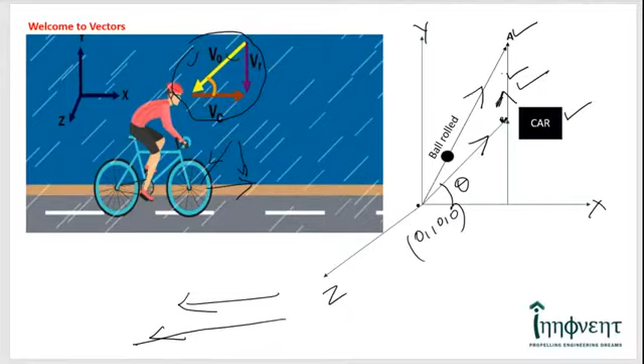When it comes to rolling, again we use vectors, and by using vectors you would have proved in your +1, +2 that this point O is the instantaneous center of rotation. When I say instantaneous center of rotation, that point is characterized by zero velocity. Why is it so? Because there is no relative motion between this roller and the ground.

And as a consequence, you would see that V is equal to omega r, where V is the velocity of center of mass, and omega r is the velocity due to the rotation. So it's a 1-degree freedom system. So let's apply this particular concept to a GATE question.

Now you see here that since this is the instantaneous center of rotation, this is a fixed point, and if you seek velocity at any point on the roller, it is quite simple. It is omega cross the position vector, right? Omega cross the position vector.

So the highest point and the lowest point would obviously have a velocity difference of 2 omega r, because if you go by this, the topmost point, the magnitude of the position vector is 2r, and since omega is constant and they are perpendicular to each other, if you take the vector product, the topmost point is characterized by 2 omega r and the bottommost point is characterized by zero velocity.

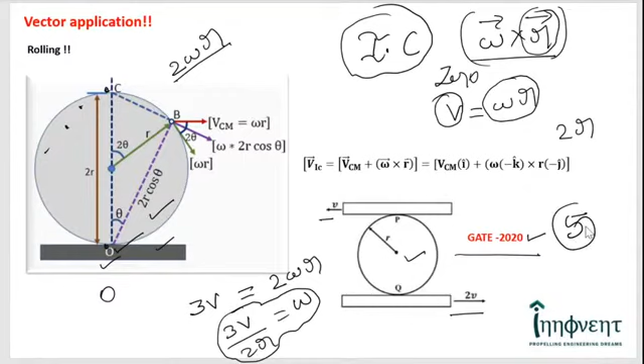Of course, it's an elementary concept, and if you look at the typical question of GATE, you can clearly see that the bottommost and the topmost point have got a velocity difference of, this is in positive x-axis, this is along negative x-axis, so the difference in velocity is 3v, and that is equated to 2 omega r, because this is perfectly rolling, GATE 2020 question, and therefore 3v by 2r is the value of omega. If you understand this simple concept, the time that you take to answer this question is approximately 5 seconds.

Now let's mature the discussion slightly and look at this particular example. I want to calculate the angular velocity of this particular link, and I'm not going to apply anything new. The velocity difference between this point and this point, that is the relative velocity, is nothing but omega into the position vector, what I discussed in the last slide. See, it is applied here. Further, we can use vectors in a number of areas. I'm going to walk through before I get into a detailed devoted discussion for vectors.

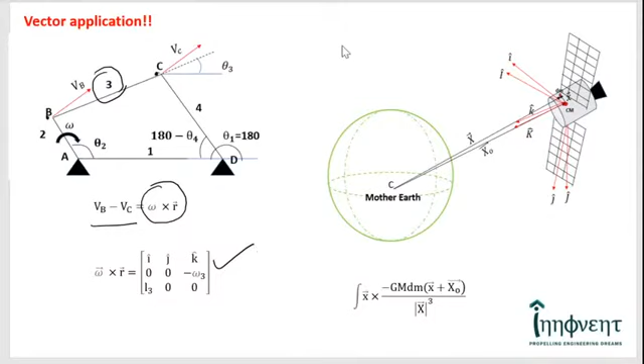You might have heard in the satellite industry that especially for low Earth orbits, satellite stabilization is done via gravity gradient torque. Most of you would have heard this. Any body which is asymmetric would experience, for example, if I take this point and this point, let's call it A and B. If this experiences a certain gravitational pull and this experiences a certain other gravitational pull which is lesser or greater in magnitude, then this entire satellite is subjected to a torque, and that torque is called gravity gradient torque.

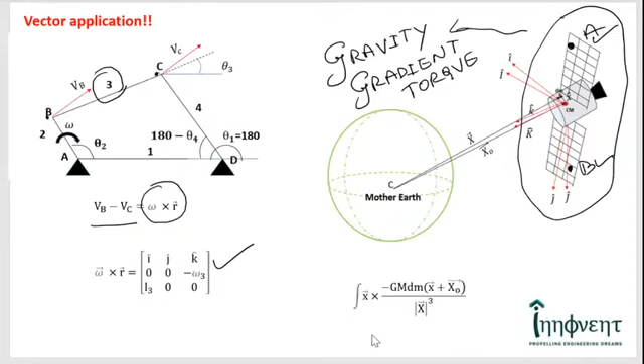You can see here, though this requires further simplification, I have chosen a mass element here. Hope you are able to see that. And I have written an expression for gravitational torque because of the resultant vector of the distance from the center of the Earth to the center of mass and the distance of the elemental mass, that is, this is the vector from the center of mass of the Earth, and this is the vector of that elemental mass from the center of mass of the satellite, and this is nothing but the gravitational force.

You might have seen this expression with r square. You see here r cube because I have expressed this in terms of vectors, and since it has to be only the direction, I again divide by the magnitude of the vector, so that is where I get this particular vector, and with that cross product with the position vector x, I end up getting the gravity gradient torque.

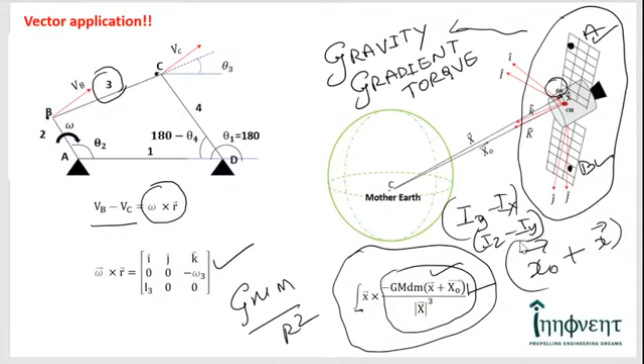In fact, if you simplify, you will get a very, very neat expression, and we would make use of the fact that gravity gradient torque is proportional to the principal inertia differences about any two axes. For example, it could be proportional to Iy minus Ix, or it can be proportional to Iz minus Iy, and of course in one of the directions, your inclination does not influence this. We'll get into that discussion in some other webinar when it comes to dynamics, but we are talking about vectors.

And similarly, if you look at the Coriolis effect on a missile, if you launch a missile, it misses the target by a certain value, and that is because of the Coriolis effect. The method that we have given here to assess the deviation is a simplified one. What we say is, per se, the velocity or the displacement of the projectile is not affected by Coriolis force. Rather, the Coriolis force provides an additional displacement because there is angular velocity of rotation of the Earth, and there is the velocity vector of the projectile at every point.

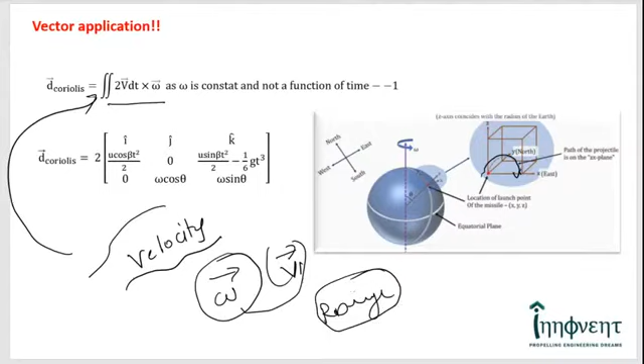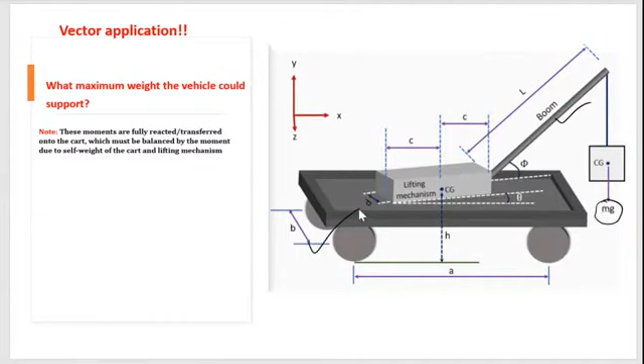And if we account for these two, the Coriolis effect provides an additional displacement, and that is where it would help the missile miss the target, and that has to be accounted for if the range is significantly large. Otherwise, the contribution by the Coriolis effect is not that great. In another example, you can see that a large weight is hung from the boom, and you can in fact calculate the moment contributed by this so as to assess the stability of this particular vehicle. Again, the use of vector product.

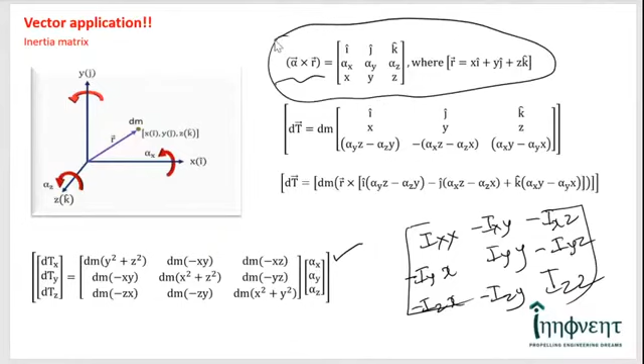Again, to derive the general mass moment of inertia tensor, what we call IXX, IYY, and IZZ, if the body is not symmetric, you would also get the cross inertia products. We'll discuss this in detail when it comes to dynamics. I'm just telling you that using basic vector product, you are actually deriving this particular matrix. So this matrix can be derived using basic vector product. That's what I'm trying to impress upon. I'm just going through various applications.

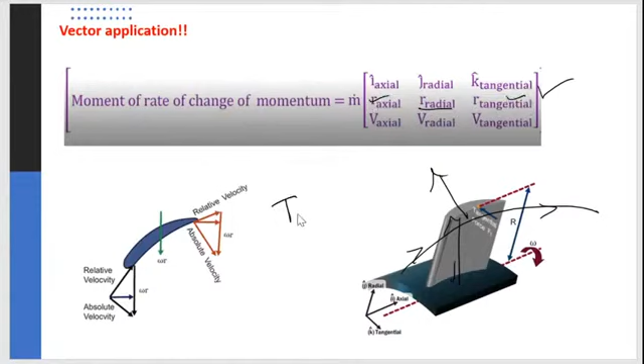Now, if you look at this particular slide, again, the vector product is used to compute the torque contributed by moment of momentum. That is, as the gas or fluid flows across the blade, there is a momentum change, and that momentum change would bring about a torque at the bottom. And you can see that for a blade, only the radial component exists, that is the moment arm, and these two don't. And as a consequence, you would get two torques. One is the tangential torque, which has to be absorbed, and of course the axial torque, which is the useful torque in driving the turbine. So again, here moment of momentum of the fluid is computed using vectors.

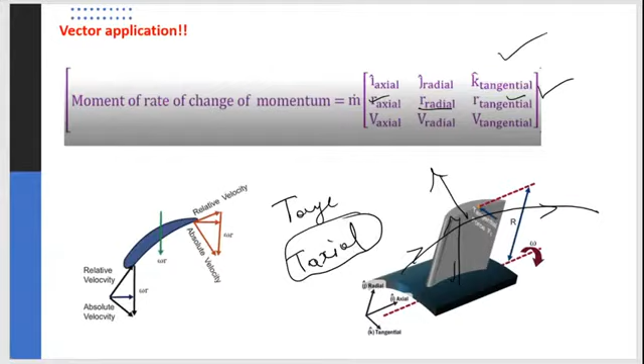One more important situation: whenever rigid bodies are undergoing motion, and if they are associated with unit vectors, then what is very, very important is that those unit vectors also are differentiated because they are associated with rigid bodies. For example, you can see that the wheel is not only spinning about this particular axis, that is the i-th axis, but about the vertical axis, that is the y-axis. It is also precessing, right? And therefore the spin vector has to be differentiated, and we'll look at this particular fact.

In fact, if you look at this example, the mass is moving with velocity v, and if you differentiate it, since it is also spinning, you get two components of acceleration, the centripetal and Coriolis. This is where differentiating a unit vector becomes very, very important. Incidentally, note that if you differentiate a radius unit vector, you would end up getting omega times the tangent unit vector, and if you differentiate a tangent unit vector, you would get the negative of the radius vector, of course multiplied by omega, the angular spin rate.

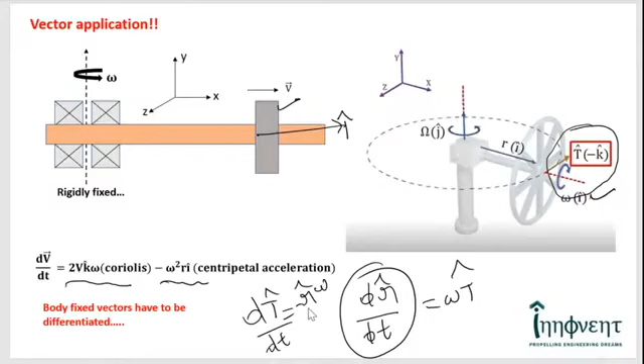Okay, these are slightly advanced concepts which we are going to cover through the course. Now, these are some typical dot products which you have learnt in your school also. But one thing I would like to emphasize here is that this is an important one, because you can see that L here we mean to be the angular momentum. Some people represent this by H also.

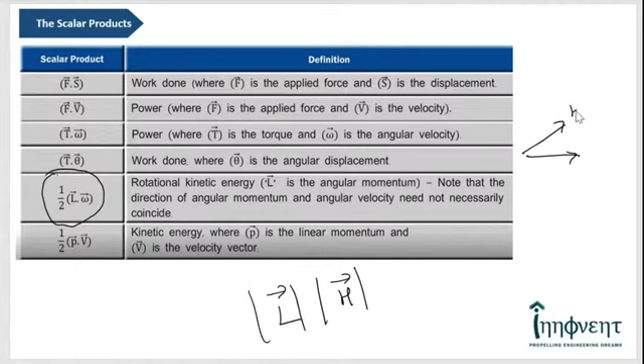And what is important is that if the angular momentum direction does not coincide with the direction of spin, then that leads to an unbalanced torque. How to go about this? We would look at it carefully, and then you also look at certain typical vector products which we saw in rolling, and then this was the moment of momentum which we looked at in a typical turbo machine situation. This is again the torque expression, and similarly you can have Coriolis, you can also have gyroscopic couple.

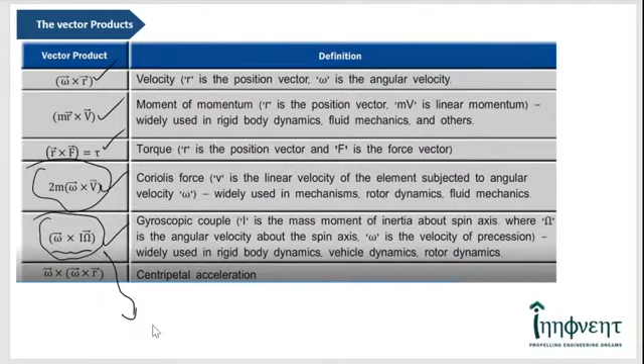And one of the advantages of dealing with these inertial couples, gyro, Coriolis, is you are able to get the direction of the couple and hence the reaction couple, because whenever you're dealing with gyroscopic couple, you're interested in the reaction couple because it is an inertial couple. It's a non-dissipating damping factor in vibration. Okay, that should be carefully understood. We'll discuss that. But the point I'm trying to say is if you use this formula and then derive any inertial quantity, you can be rest assured that you are getting the right direction. Okay, from an elementary problem solving perspective I was emphasizing.

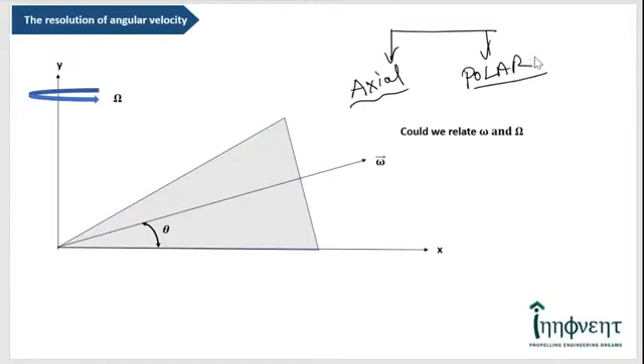And please remember that before we go in detail, there are two categories of vectors. One is of course the axial vector, and another is the polar vector, right? The direction of polar vector is natural to reckon. That means if I say a bus is traveling with certain speed along certain direction, then that is very, very natural to reckon.

But as far as the axial vector is concerned, let's say I consider a roller rolling on a ground ideally. If I consider omega, and that omega has to be represented, since it is clockwise, we would use a right-handed screw principle. That means omega can be represented by minus omega k. That means omega is along the minus k direction, and the direction is coincident with the axis of the roller. Okay, this is the omega angular velocity vector, and that is represented here.

And sometimes you may also want to split the angular velocity vector. Look at here. This is capital omega, that is, it is going around about the vertical axis. At the same time, it is also spinning about its own axis. And here, you can in fact split omega to be omega cos theta along the x-axis, and then the vertical axis component would be omega sin theta, right?

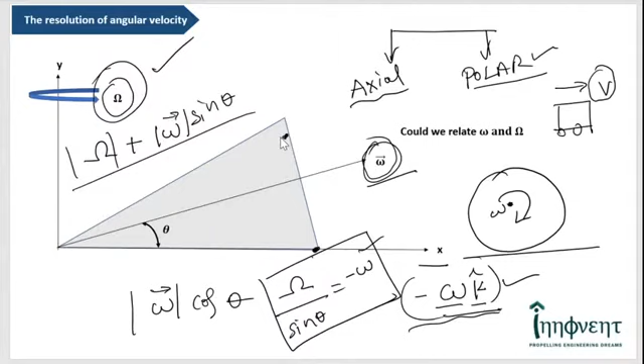And if you are interested in a general point, you can investigate, develop a position vector, and then differentiate once or twice depending on whether you are seeking velocity or acceleration. And again, this is a classical situation. Now let's move on. Now let's consider one particular case which can be applied to several product lines across the industry. This is very, very important. So follow this particular derivation carefully. Though it is a very elementary discussion, it is applied in several situations.

Now, as I said, let's consider a spin vector along the vertical direction. Let's also consider a general vector which makes an angle theta with respect to the spin vector. Now, if I split this particular vector along the x-axis and also along the y-axis, that is, if I take the components, then you can see that along the x-axis, ax is the component, and along the y-axis, ay is the component. Now let's look at differentiating this.

All right. Now, I'm going to give you a very, very basic physical observation. I'm not going to be a purist here. Now here, you see, when I take the component of this particular vector on the y-axis, that vector is along the spin direction. That is, it is spinning in the anti-clockwise direction. That is why the vector is along the positive y-axis, to be noted carefully.

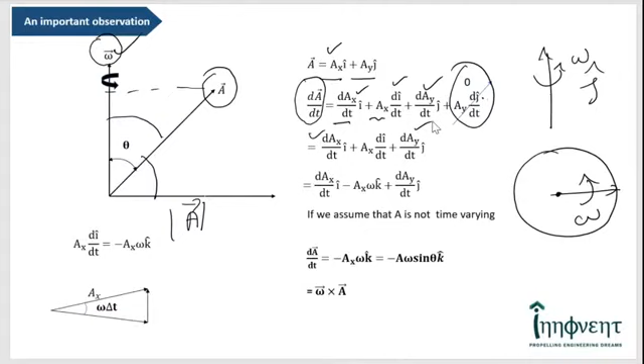But I clearly told you that since the j component is along the spin direction, it is constant, it is not undergoing change. So that goes to 0. And if I assume that Ax is not changing with respect to time, and Ay is also not changing with respect to time, then I am left with only one quantity, that is Ax into di by dt. Now we can clearly see in this diagram that as A is spun, this small change is given by Ax into delta theta.

And if I take this rate of change of A vector when it is spun through a small angle delta theta, this becomes the rate of change of that particular vector. And that change, observe carefully, if you looked at the top view, it is happening into the plane of this particular PPT. That means it is along the negative k direction, that is the negative z direction, and this is nothing but omega. So when I compute, neglecting the magnitude changes, only the direction change, I get this quantity, and this can be easily converted into a vector product.

And you see that the negative sign is justified because when you are taking the vector product omega cross A, the angle is measured from omega to A in the clockwise sense. So therefore this vector product is justified. So for any vector which is at an angle theta to omega, if that is spun, then the rate of change is given by omega cross A.

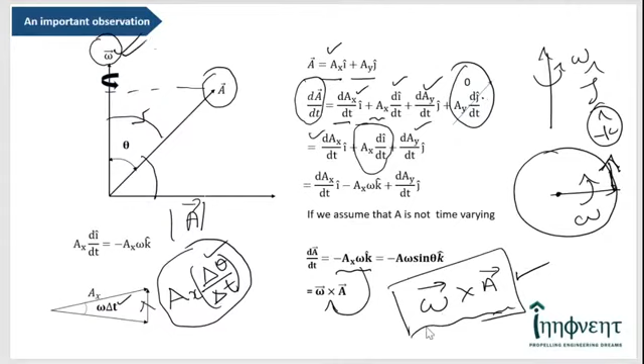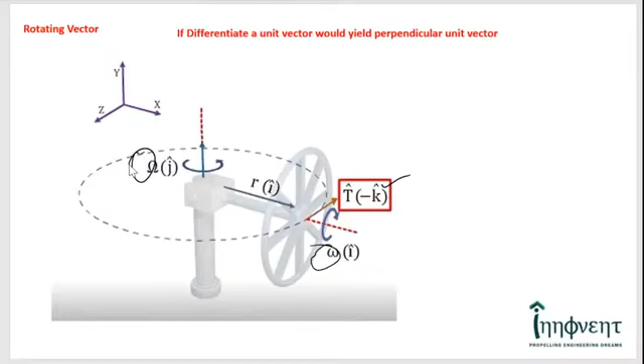And let's apply this to angular momentum being spun by this omega, assuming omega to be constant. Let us take this to be the practical case. Of course, this diagram is drawn to give you that visualization. When the radius vector is being spun, you can see that the change is taking place in the negative k direction. And here the spin vector, capital omega, is kept constant. Okay. Now, where is this concept applied?

This is applied to a rotor or a long compressor assembly, let's say, or it could be a disc or it could be a stick. When I say stick, it's a long, thick cylinder. When I say disc, it is a thin cylinder. And when it is mounted between bearings at an angle theta to the direction of spin, it does experience an unbalanced couple, and that happens because the angular momentum of this rotor does not coincide with the angular velocity.

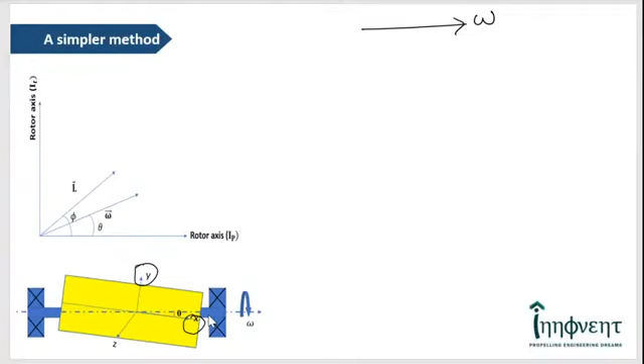The angular velocity of this rotor is along a particular axis, but you can see that the vertical as well as the horizontal principal inertial axis of the rotor are actually undergoing a conical motion. That means the angular velocity is not changing with respect to time, but angular momentum is continuously changing direction. If I call these body fixed axes, y and x, whatever momentum is associated with these axes is constantly undergoing a change in direction.

See, observe this interesting fact. Whenever I differentiate a vector, I differentiate its magnitude, let's say h, and then I also differentiate its direction. Let's say if r is the direction h is associated with, that also undergoes a change. So either the rate of change of magnitude leads to a torque, or rate of change of direction leads to a torque. That is the beauty of the vector.

For example, if I consider a circular motion and the tangential velocity at any point, represented by Vt, then the rate of change of magnitude of the velocity leads to tangential acceleration. And if I differentiate the tangent vector with respect to time, that leads to what is known as centripetal acceleration, which is radially inward, and that also verifies the mathematical fact that differentiating the tangent unit vector gives you the negative radius unit vector multiplied by omega.

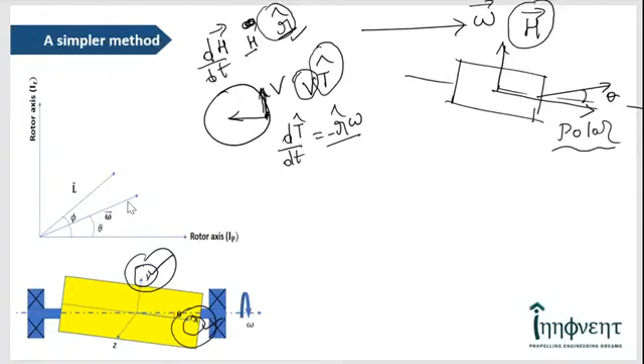Now, since the rotor makes an angle with respect to the axis of spin, let's say this is theta, and this is the transversal mass moment of inertia axis, and this is the polar mass moment of inertia axis, and I have represented both on a diagram. This is the rotor's polar mass moment of inertia axis, and this is the rotor's transversal mass moment of inertia axis.

And let's say that this is theta, because you can clearly see that the angular velocity vector omega makes an angle theta with respect to the principal inertia axis. Here I am referring to the polar mass moment of inertia axis. And since angular momentum does not coincide with omega, let's say it makes an angle phi.

Now let's apply the formula that we just derived. What was the formula? It is omega cross h. And that could also be written as omega into h into sine of the angle between the two vectors. Here it is nothing but phi minus theta.

And if I expand this using elementary trigonometry, keeping omega outside and taking h inside, I get h sine phi into cos theta, minus sine theta into h cos phi. You can clearly see that h sine phi is nothing but the projection of angular momentum onto the vertical axis, and h cos phi is the projection onto the horizontal axis, that is the polar mass moment of inertia axis.

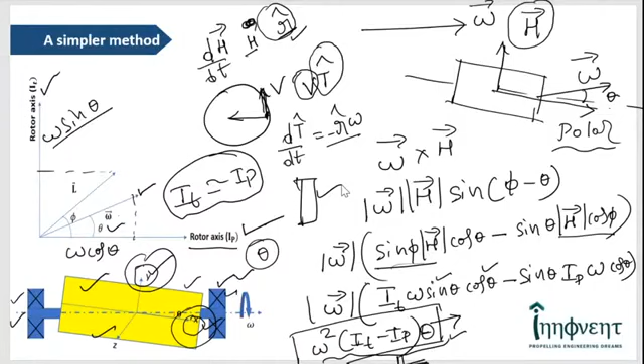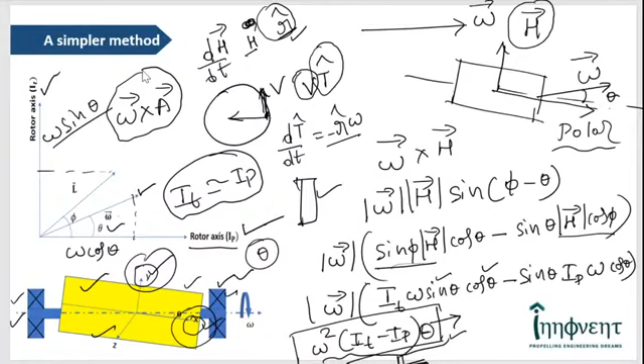The beauty of the physics and maths is you started with a very, very basic vector product, and when you applied it to a practical situation, so many facts start tumbling out, and that is very, very important. And of course, you can also research detumbling of the satellite, which is again a very, very important phenomenon.

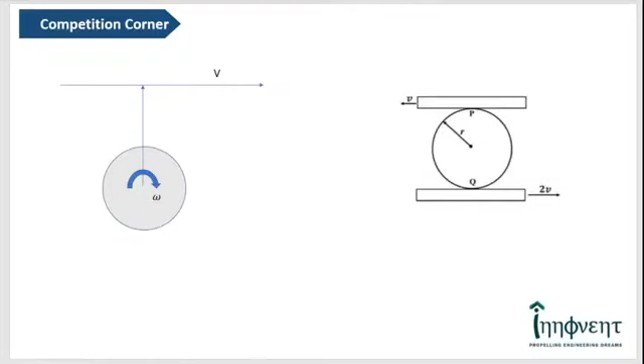Now, when it comes to competitive corner, we have chosen one standard case study that is from a research interview, which is very, very interesting. Now, let's start with a typical mass moment of inertia tensor for a cube which is located in the Cartesian system with one of its corners coinciding with the origin.

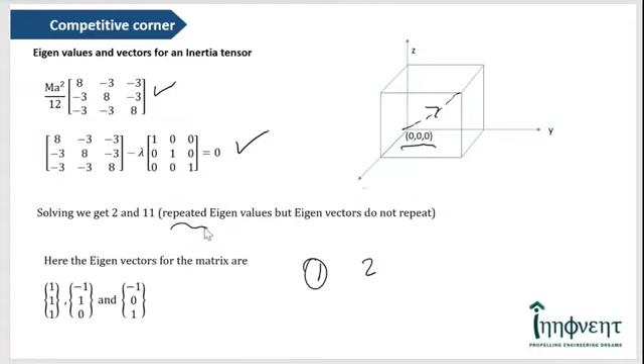Now, if I seek the eigenvalues, in fact, I would get two eigenvalues. One eigenvalue is of course obvious to reckon. That is the mass moment of inertia about the principal diagonal of the cube, that is the solid diagonal of the cube. And the other two are of course perpendicular to that. But what is to be observed very, very carefully here, these are repeated eigenvalues, right? Because any 3 by 3 definite matrix would have 3 eigenvalues, 3 roots of the characteristic equation. But how do you interpret it if the roots are repeated?

Now, if you use a typical online calculator, you get these products. Please remember that since eigenvectors are mutually perpendicular to each other, these are unit vectors. Of course, since they are derived from the homogeneous set of equations, they cannot be defined in their entirety. So these are 3 unit vectors. And if you take the inner product of any two vectors, when I say inner product, it is the dot product. Obviously, cos 90 being the angle between them, the dot product goes to 0, right?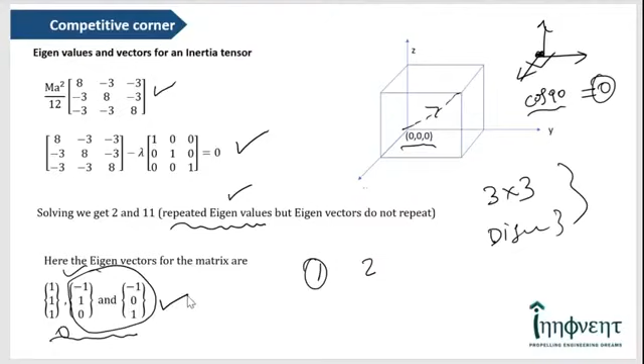And if you observe, that holds for only two sets of vectors. For example, if I take -1 plus 1 goes to 0 and 1 into 0, 0, this is valid. And if I take the dot product, it is plus 1, 0, 0. For these two vectors, the dot product is not 0. That means we haven't got the set of vectors which are mutually perpendicular, so they are not linearly independent.

So let's look at this particular case. How do you go about it? Now, I have got two vectors, and I would find the third vector in such a way that this vector is perpendicular to the other two vectors.

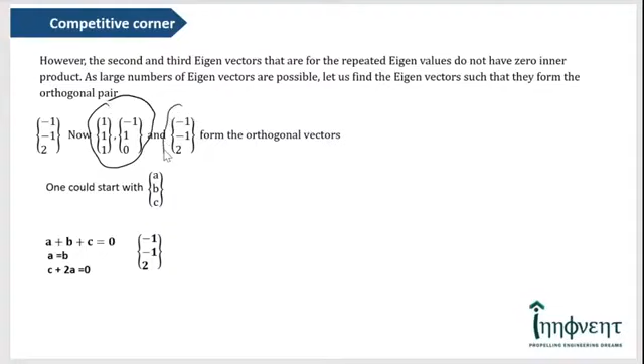When I do some basic algebra and then arrive at this, I get this particular vector, and you would see that this is actually perpendicular to the remaining two vectors. So the requirement of orthogonality is actually satisfied, right?

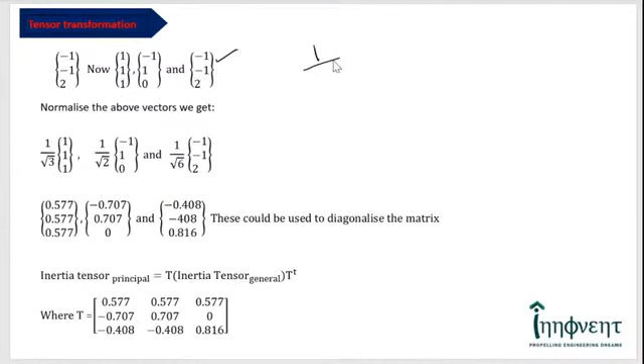Now let's come here. If I normalize these vectors, because if 1, 1, 1, then I would divide that by root 3. And it is easy to explain that if you consider a cube and calculate the direction cosines of the solid diagonal, which is from this corner to this corner, you would see that this is inclined equally to x, z, and y axis. And as a consequence, each angle, that is cos phi, is 1 by root 3. So when you normalize, you get that 1 by root 3 is 0.577.

And similarly, you can divide this vector by root 2. You get these two. And then the third vector could also be divided by root of 2 square is 4 plus 1 plus 1, that is root 6. When I did that, I get this vector. And look at the question.

The candidate was not only asked to find these vectors, but was also asked to construct the transformation matrix using this. Coordinate transformation is applicable to any tensor, and this is basically the nature of the equation you are seeing here. It's an orthogonal transformation matrix, inertia tensor, and then transpose of that matrix. What I am doing essentially here is putting my first eigenvector in the first row, second eigenvector, and the third eigenvector.

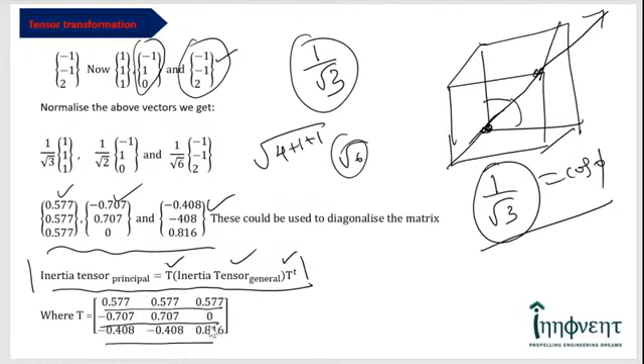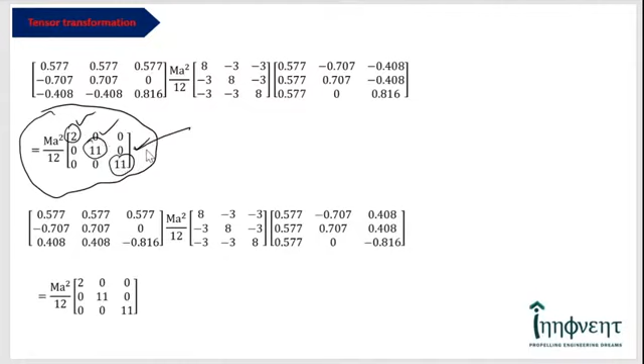When I do that, you can see that my inertia tensor is getting reduced to principal inertia tensor, that means I am getting the three principal inertias. One, of course, about the solid diagonal, and about other two axes which are perpendicular to the solid diagonal. It is easy to interpret. Why am I getting 11 ma square by 12?

Because through the solid diagonal my inertia is ma square by 6 plus m into, if you calculate the distance from CG to the origin, it is root 3 by 2. If you square it up and simplify, you will get ma square 11 by 12. Okay, it is easy to interpret.

And you can see that even if you were to calculate the reverse of the third eigenvector, that means instead of minus 1 in your algebra, if you were to calculate 1 minus 2 also, the transformation again yields the diagonalized principal inertia tensor. Diagonalized inertia tensor, or you can simply call it the principal inertia tensor.

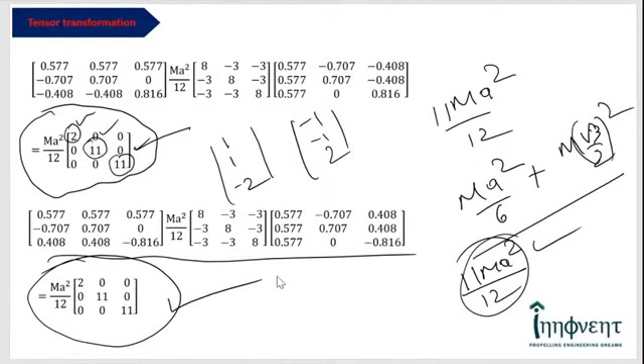Now we'll choose one more example to physically visualize this. Of course, you can use GeoGebra or MATLAB, a lot of free mathematical tools available on Google, and you can in fact see whether they are orthogonal or not. And more than mathematics, using MATLAB, Maple, GeoGebra is very important, because that builds a lot of visualization and detailed understanding. Look at this particular simple vibration example.

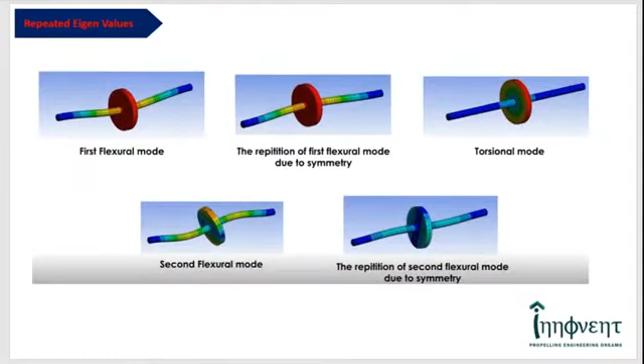If you simulate this in ANSYS, you will get repeated roots, right? That is because of the symmetry. See, this rotor is vibrating in the vertical plane, and this rotor is vibrating perpendicular to that, in the horizontal plane. The eigenvectors do not repeat. That is very important. Eigenvalues repeat, eigenvectors do not. And you can see that the second flexural mode also repeats, but again in different planes. So this is one more example. So thus, in vectors, you can find lots and lots of applications for mechanics.